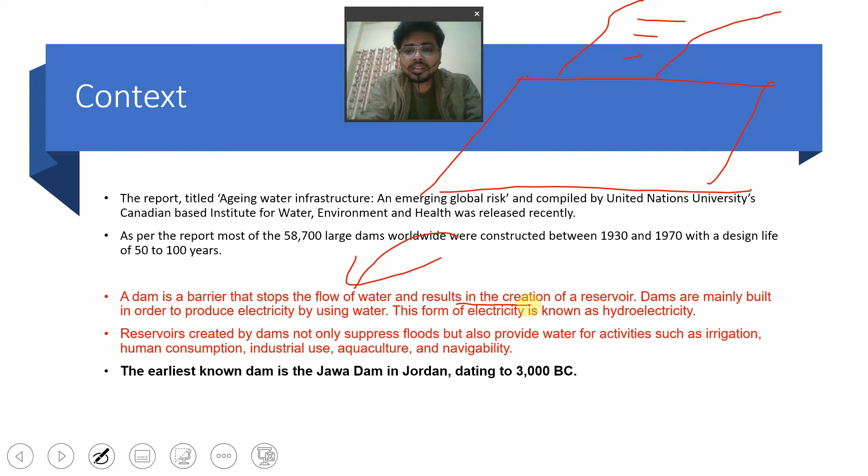and this barrier is used to check the river, hold it, and use it for its own purpose, like the production of electricity or providing maintenance. If the water level increases, this helps in checking the water capacity and letting out the water flow to the outlet in a managed manner. So a dam is a barrier that stops the flow of water and results in the creation of a reservoir.

When the water wants to be released, it will be released from this hole. Okay, so that kind of infrastructure used to be there for most of the dams. So dams are mainly built in order to produce electricity by using water. That is something called hydroelectricity, and that is a renewable source of energy.

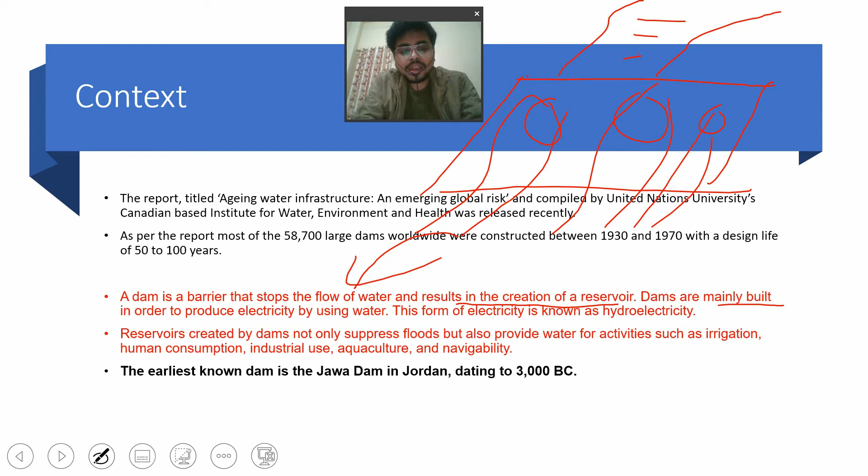But this is not considered to be feasible because the land, the rehabilitation of the people, the destruction of your natural environment, all those cost factors responsible for the construction of the dam become very high. Yes, the money you are going to earn will be more.

Further, you are using a renewable source of energy, so you are not going to contribute any pollution to the environment. But yes, there is another cost attached to it. That is something called your environmental cost. You are hampering the environment. You have the rehabilitation of the people. You have to take care of all those people who lived in that area, like the tribal peoples, and all. So that kind of cost is also considered when you compare some infrastructure development in a particular area.

So reservoirs created by dams not only suppress floods but also provide water for activities such as irrigation, human consumption, industrial use, navigation, or some aquaculture, like water-related culture activities and all. These dams can also be used for this purpose.

So these are the benefits of it, but there are certain drawbacks to it also, and those drawbacks can lead to a disaster. What is a disaster? We will see in this coming slide. Just for clarification, I have explained disasters as well. So the earliest known dam to human beings is the Jawa dam in Jordan, dating to 3000 BC, that is, before Christ.

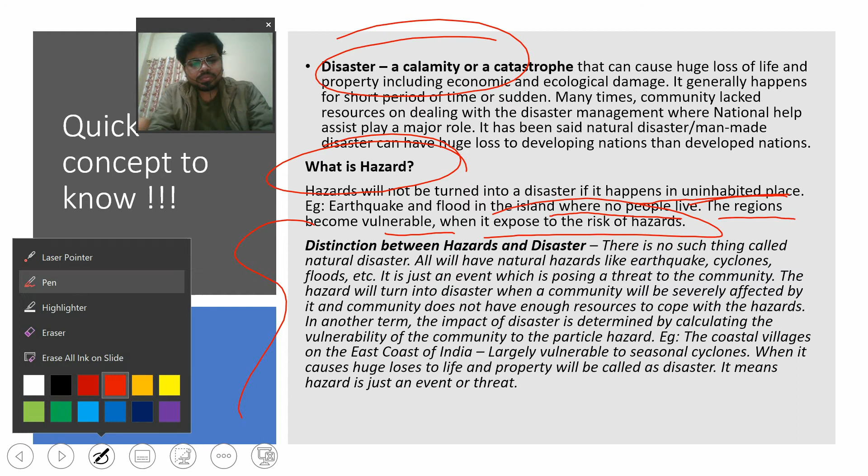So hazards will not be turned into disaster if they happen in an uninhabited place. As I said in the example, suppose there is an island, you don't know who lives on that island or the scenario of that island, and a tsunami occurs. You will call it a hazard, not a disaster. Example: earthquake and flood on an island where no people live. The regions become vulnerable where they are exposed to the risk of hazards. So the basic difference: disaster is loss to life and property; if there is no loss to life and property, you will call it a hazard.

So what is the distinction between hazards and disaster? There is no such thing called natural disaster. That is a very key point. All are natural hazards. Why? As per the definition, disaster is the loss of life and property. Whatever happens naturally is natural only. Earthquake is natural, a storm or cyclone coming is natural, tsunami is natural. But when it affects human life and property, then we coin the term natural disaster. But literally there is no such thing as a natural disaster.

So all are natural hazards, like earthquakes, and we call it a disaster when it affects life and property. Earthquakes, cyclones, floods, etc. are just events posing a threat to the community, and the hazard will turn into a disaster when there is loss to life and property. The hazard turns into a disaster when a community is severely affected by it and does not have enough resources to cope with the hazard.

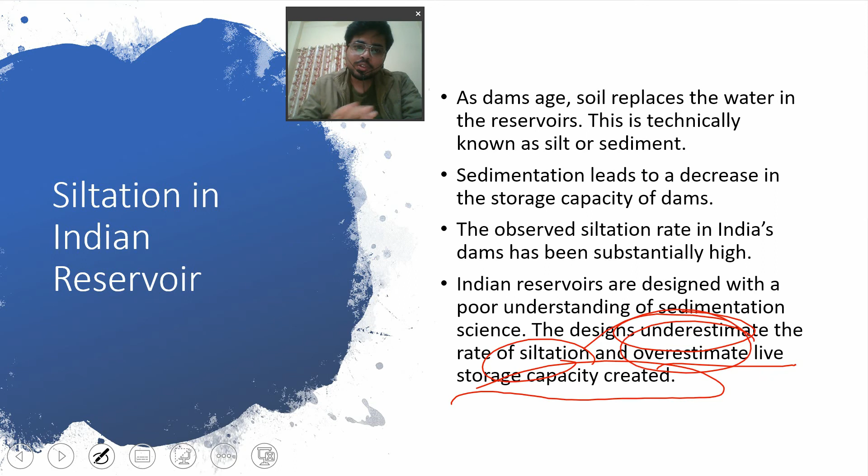And ultimately, when the siltation is increased, the capacity of the dam will decrease. So both the objectives have failed in this one attack only. Okay. So what are the consequences of aging of the dams in India? Water insecurity is one of the major concerns.

What is the major water insecurity? Why is it considered water insecurity? Because dams are built for irrigation purposes, for agriculture and all. They are meant for water security. So why is it considered water insecurity? What are the concerns behind calling it water insecurity? It is because it could impact not only related economic activities like agriculture, but will also have other unwarranted environmental impacts, that is the other

cost embedded with it. One, okay, we are considering it for economic activities like agriculture, but when the height of the dams has already decreased with sedimentation, what water are you holding, what kind of water are you going to give to agriculture? And when the rainfall is high, dams leave all the water, there's no option with the dams, and ultimately when they release all the water they were holding, the downstream areas are going to be flooded.

And the flood is not like that rainfall kind of flood. Those floods have a high intensity, so it could impact not only economic activity like agriculture, but will also have other unwarranted environmental impacts. What are the environmental impacts? I will give you one scenario.

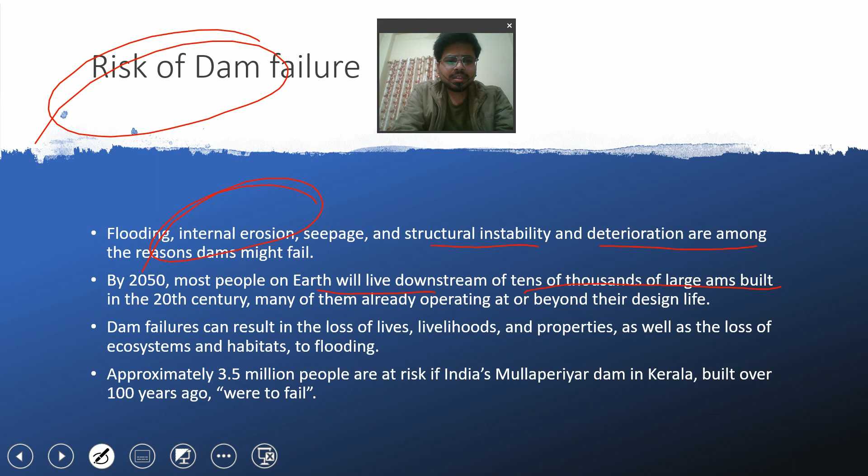By 2050, most people on the earth will live downstream. The population will increase downstream. In the top regions, general people are not there; top regions are your mountainous regions and all. So downstream of tens of thousands of large dams built in the 20th century, many of them are already operating beyond their design life. Many of the dams are still working beyond their design life, and we have to check on it. Dam failures can result in the loss of lives, livelihoods, properties, that will ultimately lead to what?

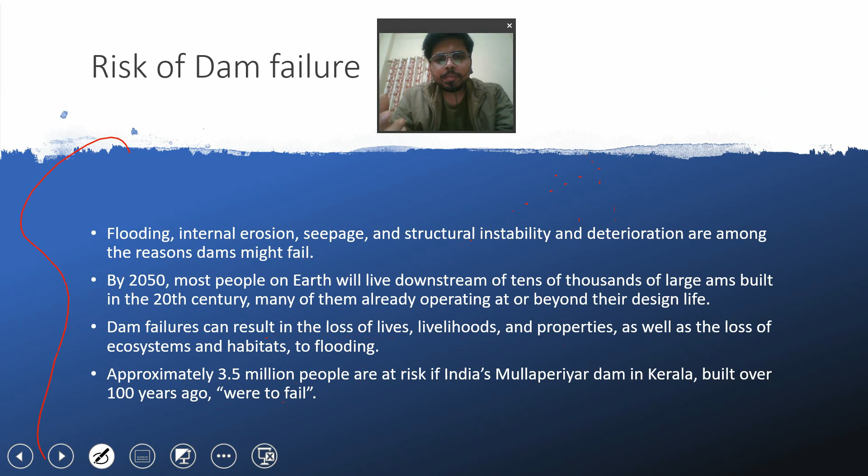Disaster. That will ultimately lead to disaster, as well as the loss of ecosystems and habitats to the flooding. And approximately 3.5 million people are at risk if India's Mullaperiyar Dam in Kerala, built over 100 years ago, fails. Okay, so those are the scenarios that can happen with the risk of dam failure, and the reasons behind the risk of dam failure that have been given. So that is one of the major concerns for dams.

Now, what are the steps that have been taken by the government, and what steps will the government take? Governments have observed these things, and now governments are thinking on it and taking steps as well. But before moving on to this concept, I will tell you one thing. India is a federal country. Okay, India has states, India has union territories. There is the union government and state governments. There are certain things that have been given full rights to the state. There are certain things that have been given full rights to the central government.

Okay, two things. Now, in the case of river water, the jurisdiction over the river lies with the state government when the river flows and ends within the entire state. If a river flows within the entire state, the construction of dams, whatever happens, will come under the jurisdiction of the state government. Okay. Second thing, if a river flows between two states, interstate, in that scenario the central government will intervene. The state government will be included, but the central government will intervene. So these are the two things that are always the concerns between states, as we will see in the Kaveri river and all.

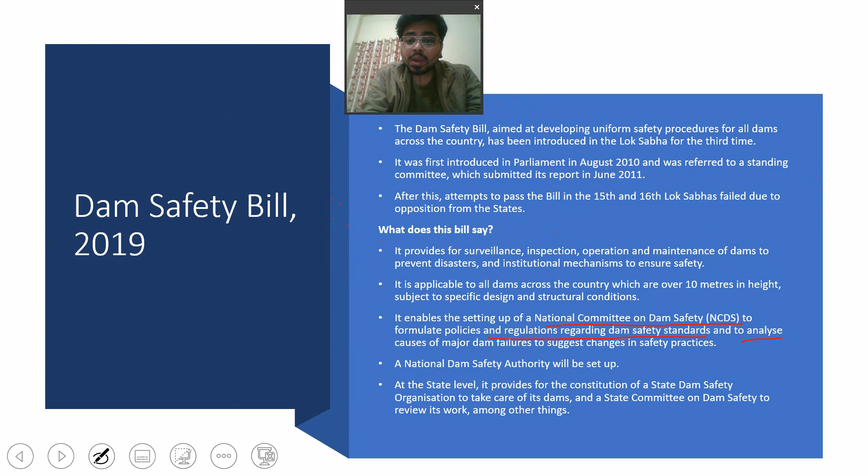It enables the setting up of a National Committee on Dam Safety, NCDS, to formulate policies and regulations regarding dam safety standards and to analyze the causes of major dam failures to suggest changes in safety practices. This will also come under the Dam Safety Bill, where checking will be done on what safety standards you are going to take, and what safety standards we took and failed. That kind of analysis should be performed by whom? This National Committee on Dam Safety. The NCDS will perform those activities.

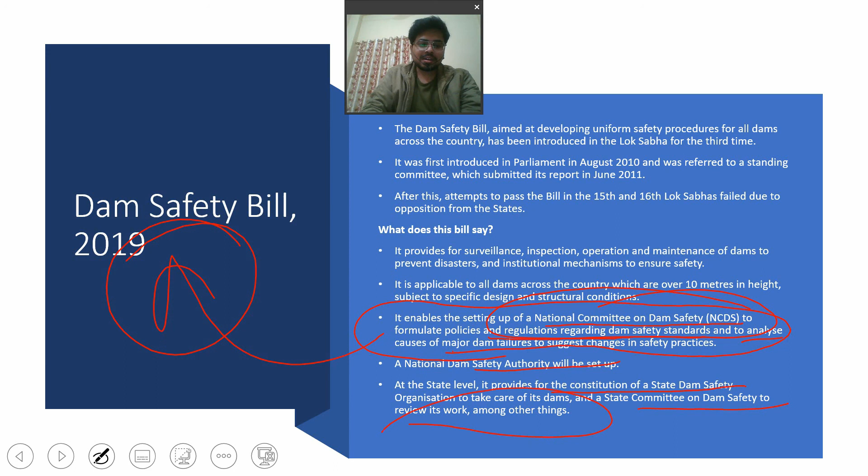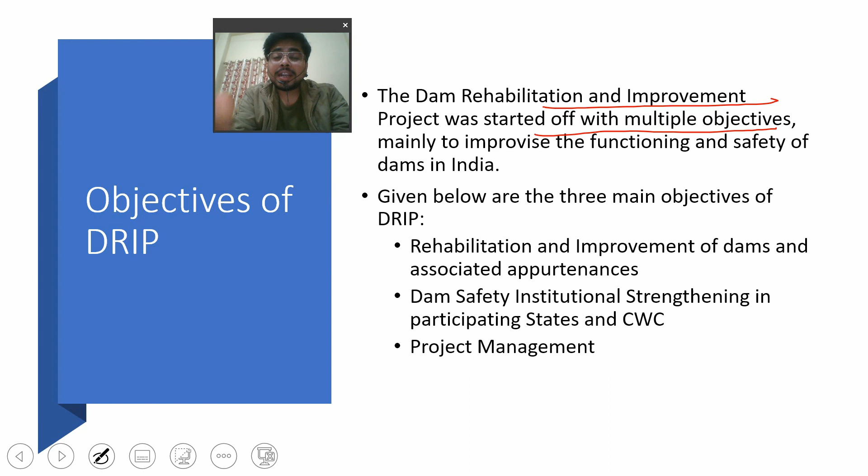A National Dam Safety Authority will be set up. At the state level, it provides for the constitution of a State Dam Safety Organization to take care of its dams, and a State Committee on Dam Safety to review its work, among other things. As I have said, interstate and state rivers. So what are the objectives of this rehabilitation and improvement project? The Dam Rehabilitation and Improvement Project was started with multiple objectives, mainly to improve the functioning and safety of dams in India.

Given below are the three main objectives of DRIP: rehabilitation and improvement of existing dams, that is the old dams, and associated appurtenances, that is related things with the dams; dam safety institutional strengthening in participating states and central work committees.

That is some coined term. I'm forgetting this term here. Remove this term. Okay, Google it, you will get to know. So the full form, I am just removing it.

So dam safety institutional strengthening in participating states and central related stuff, and project management, are the objectives under DRIP, that is the rehabilitation and improvement project.

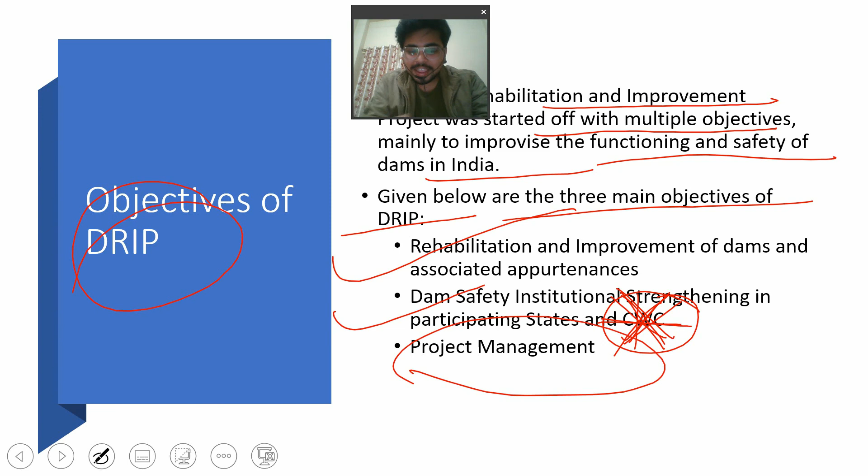Okay, please don't judge me for that thing. I just missed this CWC part.

Okay, so the significance of DRIP phase 2 and phase 3: the dams in India need to be administered and taken care of because they constitute a major part of the economic development in the country, and there are a few major factors regarding failures which need to be included.

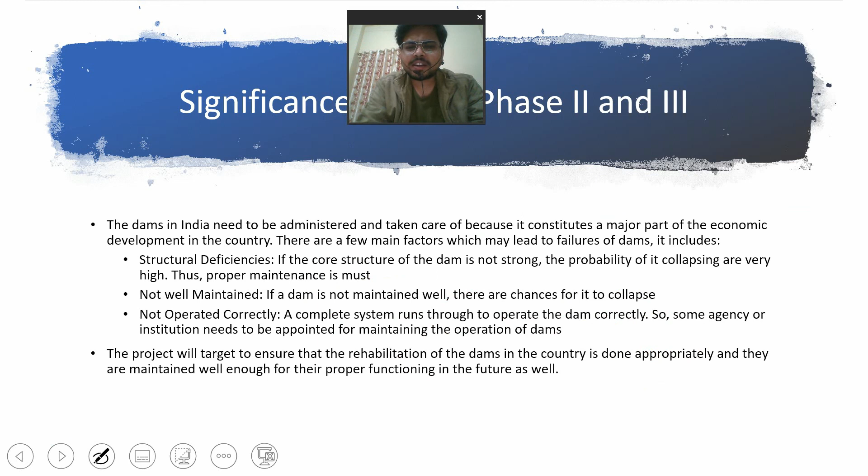So in the starting I explained the importance of the dams, like it helps in the agriculture. It is one of the sources for economic activities, generation of electricity, hydroelectricity. One very important thing, that is a renewable source of energy. And as per our Paris Agreement, these things are adding a plus point.

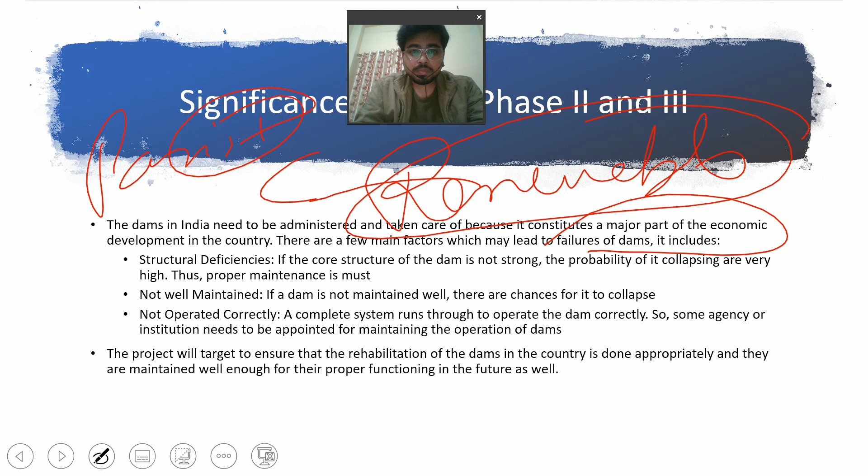But right now we are shifting towards solar energy generation, because the construction of dams is a huge thing, a huge cost, not economical, and by ecology also. Because rehabilitation of the people takes place, and those things are costly. Remove that financial part, the ecological part is also an important one.

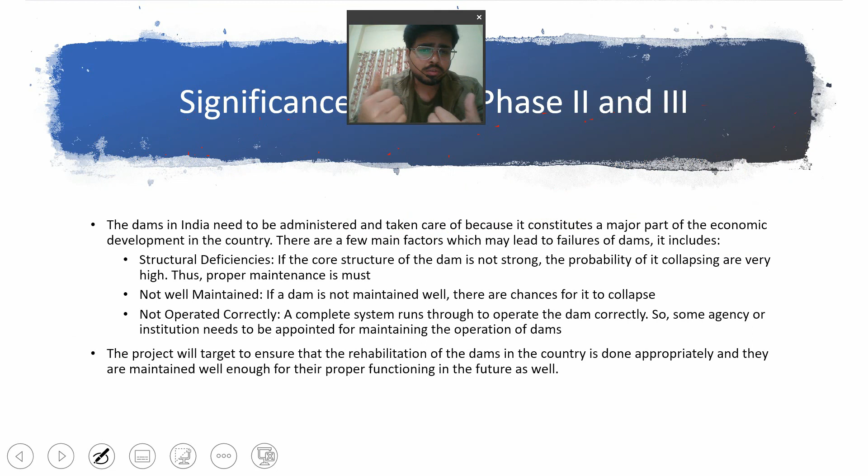Okay, so there are a few main factors which may lead to the failures of dams. It includes structural deficiencies, lack of structures, architectures, designs, poor architecture, didn't think about any siltation, or you are underestimating the concept of siltation. That is something called structural deficiency. So if the core structure of the dam is not strong, the probability of its collapsing is very high. Thus proper maintenance is required.

So if you are maintaining the dam, closing the dam for a particular period of time, 1 month each year for cleaning the siltation part, plus point, the life of the dam will increase, and further the cost will decrease if every year you are cleaning the dam. Because you are removing the siltation, ultimately the capacity of the dam is going to be increased, and every year you are doing it, so work will be less.

Not well maintained, maintenance cost is ignored. So if a dam is not maintained well, there are chances for it to collapse. Not operated correctly, the poor maintenance, poor operations, the engineers operating it not following proper guidelines, security guidelines and all. So a complete system runs to operate the dam correctly.

So some agencies or institutions need to be appointed for maintaining the operations of the dams. There must be some institution or agency who will check what kind of operations are being performed by the dams, what steps they are taking, what maintenance costs they are taking, and all. So those important parts will be considered in phase 2 and phase 3 of this rehabilitation project. The project will target to ensure the rehabilitation of the dams in the country is done appropriately, and they are maintained well enough for their proper functioning in the future as well.

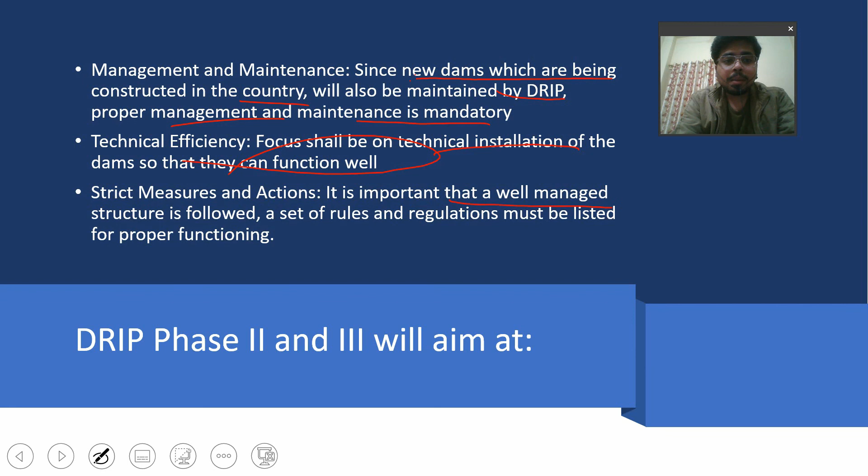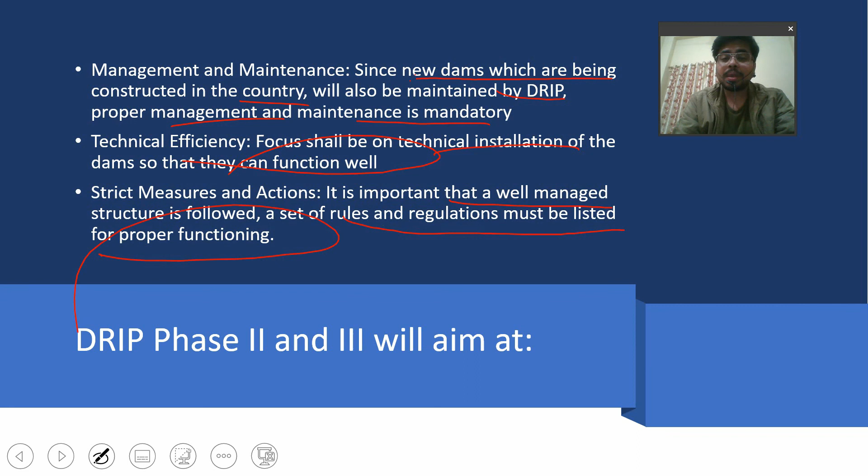Strict measures and actions: it is important that a well managed structure is followed. A set of rules and regulations must be there for proper functioning, and suggestions have been given by the experts. There must be an agency who will check whether all those things are being followed by the dams or not. Okay.

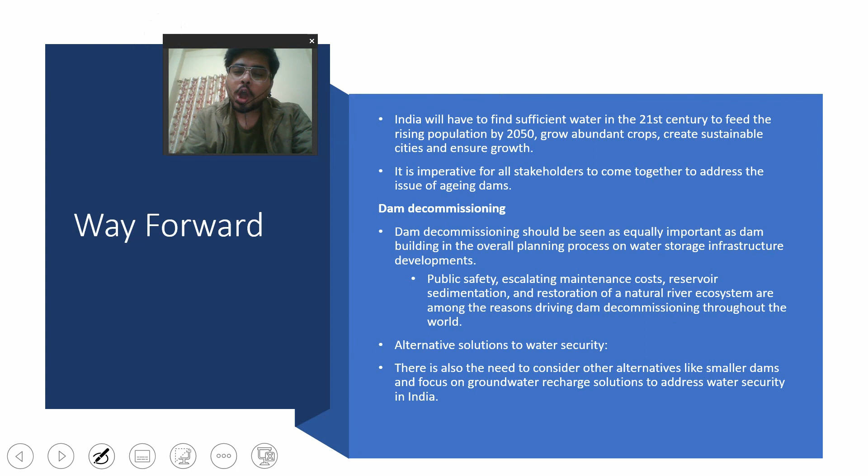So what will be the way forward? India has to find sufficient water in the 21st century to feed its population. Rising population by 2050, grow abundant crops. Absolutely, population will rise. We can't expect that population is going to be reduced. And right now India is at the youth stage. That is the population graph, population pyramid, another concept in the economic part. Leave it here. Okay, so grow abundant crops, create sustainable cities, and ensure development by 2050.

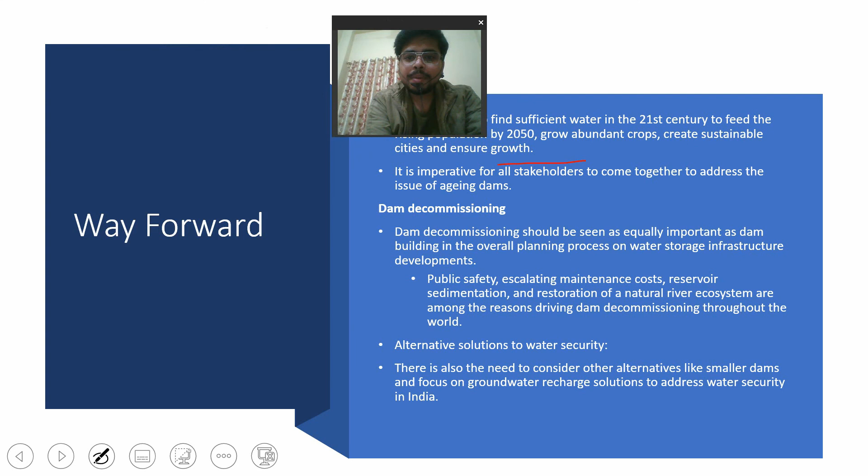So there is a need of sufficient water in the 21st century, so we have to take care of those dams as well. So it is imperative for all stakeholders to come together to address this issue of the aging of dams, and dam decommissioning should be there. If a dam is not useful, just decommission it, otherwise you are inviting another disaster for the country. So dam decommissioning should be seen as equally important as dam construction.

Okay, if we are giving importance to dam construction, then we have to be sure that after the aging of the dams we decommission them if they are not useful. If you are living in a house that is 100 years old, and after 100 years you find that this house is not useful, you have to break that house. Even before 100 years, if the life of the house has decreased, you have to demolish it. That kind of concept applies to dam decommissioning as well.

If the dam's age is completed, or if it is not working properly before that age, you have to decommission it, otherwise you are inviting another disaster and there will be huge loss of life and property. So dam decommissioning should be treated as equally important as dam building in the overall planning process of water storage infrastructure development. Public safety, escalating maintenance costs, reservoir sedimentation, and restoration of natural river ecosystems are among the reasons driving decommissioning throughout the world. Nothing to explain here.

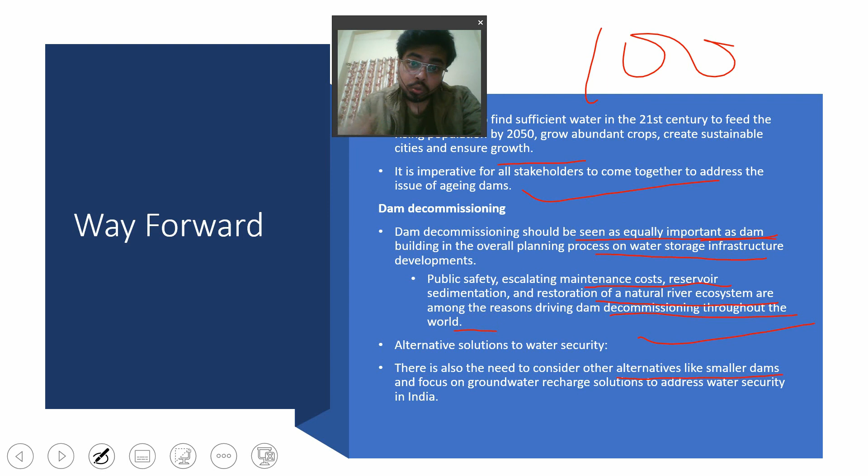And alternative solutions to water security should be there; there is also the need to consider other alternatives like smaller dams. Construction of a large dam is a huge cost. If it fails, there is huge loss of life and property. If we are... the Delhi government has taken a step of recharging the groundwater capacity along the Yamuna river, so that kind of step should be taken.

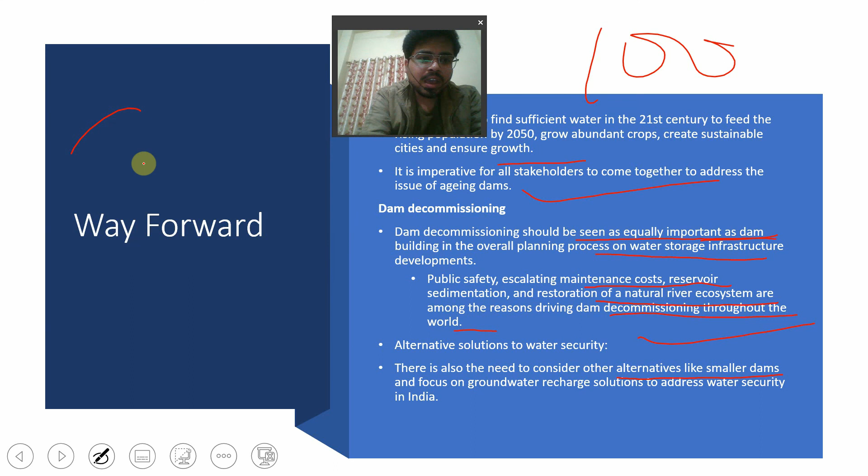Otherwise we are inviting a situation like metropolitan city floods, like the flood that happened in 2020 in Hyderabad. Okay, why does that kind of flood happen? All the roads within the streets are concrete based. Outside your house also you will see a concrete road. What happens when there is a concrete road? Where will the water be absorbed? There is no soil. Water will stay on your roadside only.

If there is poor drainage, water will be on the roadside only, in the street only, and that will create a flood situation. That's what the term metropolitan city flood means. I have made a video on that also, you can watch it.

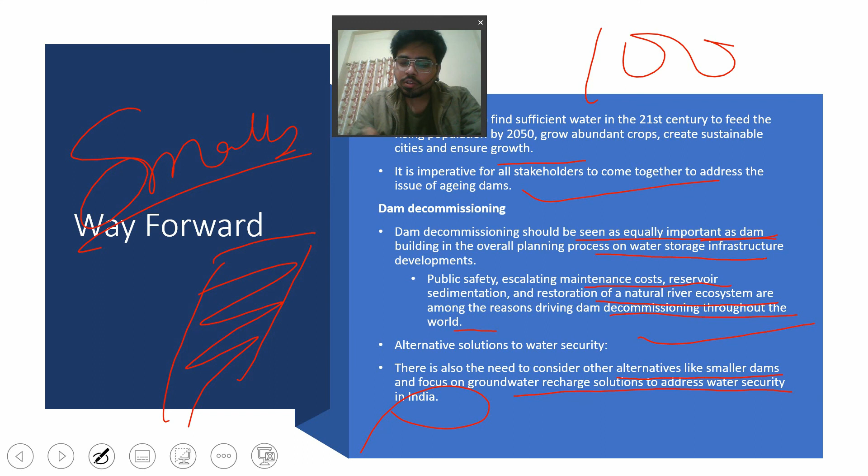So with construction of the dam, you are inviting an earthquake, as the weight over that land will increase. The pressure on that land will be huge if it is a large dam, and ultimately the plates will try to readjust, and that will be the reason behind your earthquake. This is the definition of induced seismic activity: when you apply pressure, seismic activity will take place. Okay, no need to remember it, this is for the sake of completing the information, it is just a fact.